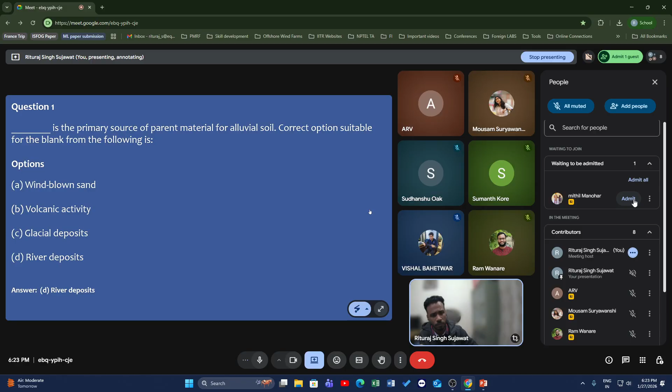So usually the composition of the geological material, which is the alluvial soil, is made up of various sediments which have flowed through, let's say, a particular span of time, and get deposited at a certain section of your river path, and that leads to the formation of your alluvial soil. So for this particular question, the correct answer is river deposit. So it's a straightforward question.

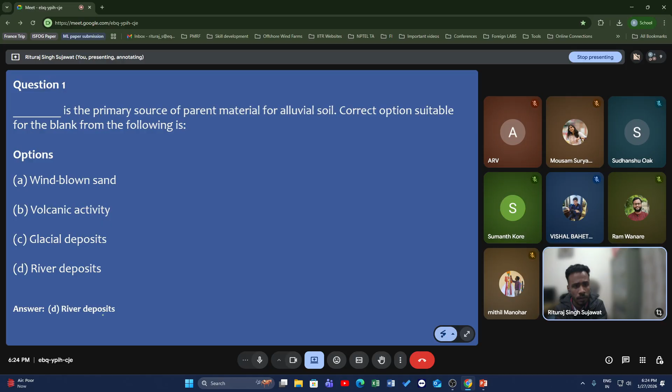If you guys have any query, please raise your concern. Then we can move to the next question.

Yeah. So which is the correct option from the following for the degree of saturation in soil mechanics? So how do you represent the degree of saturation?

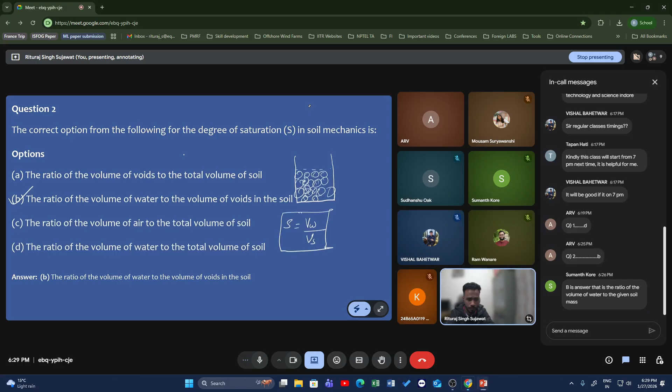Sir, it is VW by VV. Oh, sorry, my bad. Yeah, it's the volume of voids. Yes, so your volume of voids is represented by VV. So S is equal to VW by VV. Yes, guys, any doubt in this?

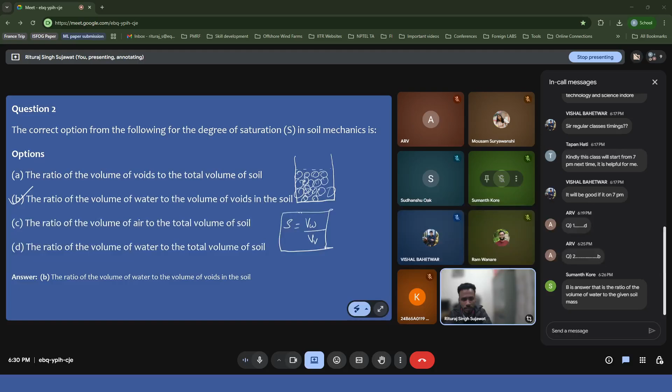So just to brush up again, your volume of water is represented by VW, then you have volume of voids by VV, and then volume of solids, which is your soil particles, is represented by VS. Similarly, your weight of water will be WW. You won't have any weight of the air voids, and then you have weight of solids.

Yeah. So let's move to the third question, guys. Any discussion on this, if you want to have? Okay. Moving to the third question. So you need to show how we represent the coefficient of uniformity. What is the particular relation which we use?

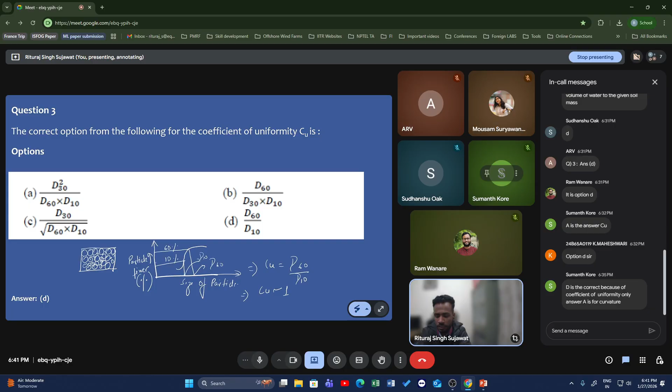Okay, if not, then we can move to our next question, which is question number 4. How do you define effective stress in the soil?

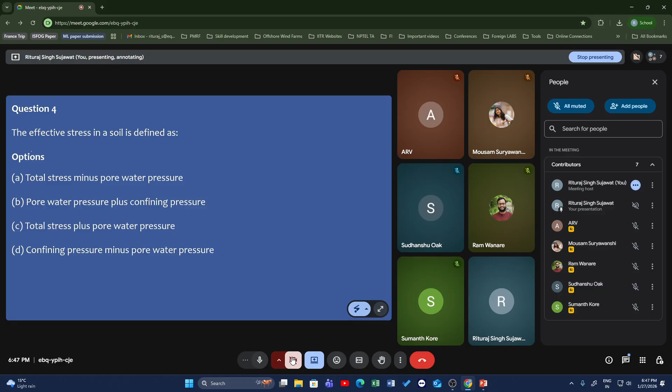Just want to have an answer from you guys. Okay, whatever I am writing, it's not showing you. Wait a second.

Yes guys, so the correct answer is option A, which is total stress minus pore water pressure. So usually stresses in the soils are represented by the effective stresses, and it is a very famous relation in geotechnical engineering, which is total stress minus the pore water pressure.

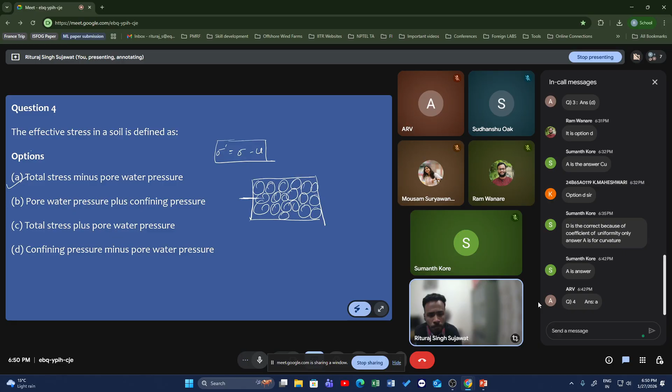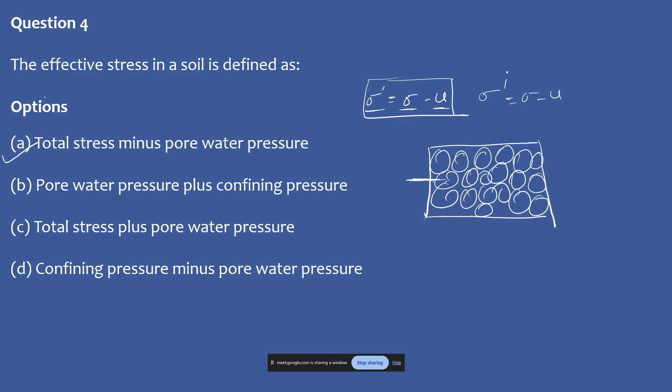Okay, I'll answer this. So usually at any point of our interest, you'll be having the pressure from the soil mass, or from any load coming from the superstructure above the soil. That will impart load at this particular point, leading to a normal stress, represented by total stress. This stress is counteracted by hydrostatic stress offered by water particles between the soil particles, imparting pore water pressure. To account for both stresses, we represent this parameter with effective stress, known as sigma dash. Thus sigma dash equals sigma minus u, total stress minus pore water pressure, giving effective stress. So the correct answer is that option.

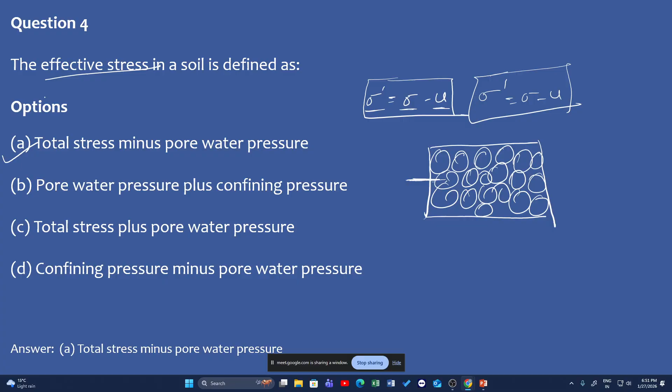So moving to our next question, question number 5. In the Mohr-Coulomb failure line, what does the intercept on the shear stress axis represent? So we are having a Mohr-Coulomb failure line available with you, and what is the intercept on the shear stress axis represents?

If you guys can recall, we usually perform a certain type of test to account for the C and phi parameters of our soil, a very famous test known as the direct shear test. To obtain those parameters, we plot a certain result, and with the help of that plot we obtain the C and phi parameters. So coming back to our question, what does the intercept on the shear stress axis represent?

Hello, you guys can hear me, right? Yeah, okay, okay.

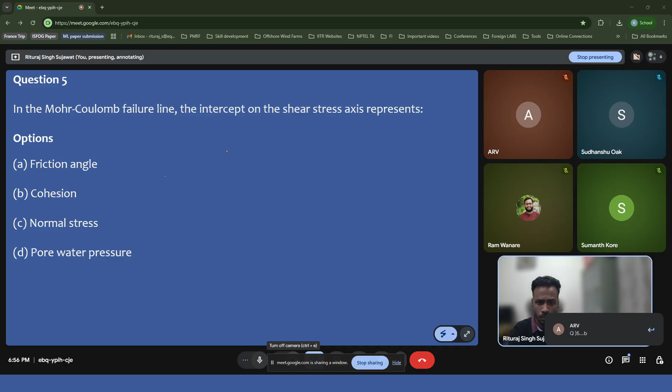So let's look at this. We are having answers from our people. So for those who are new to this concept, let me tell you in simpler terms.

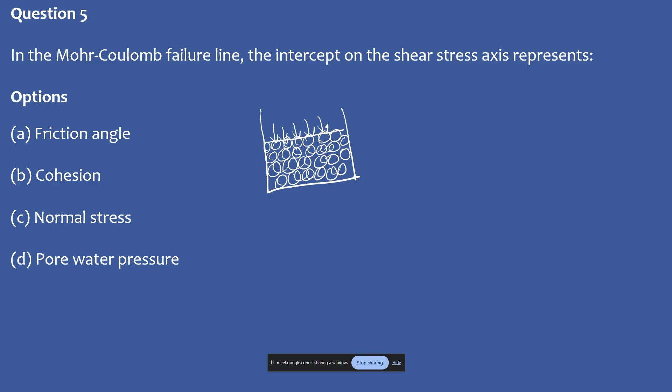Let's say if you are having a certain soil matrix available with you, and it's subjected to a certain amount of normal load. If I take out two particles, these particles will be having a certain amount of normal load acting on them, and also within the particles you will be having a shear force acting along the surface of the soil particle. This is represented by tau, and the normal stress is represented by sigma n.

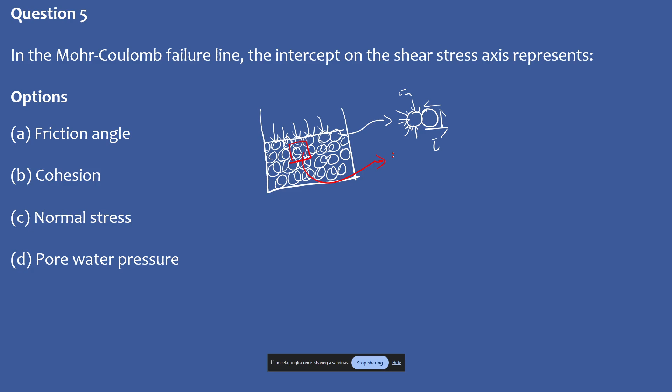So to account for the failure of this soil mass, let's say if I take a certain element out of this soil matrix, a small matrix taken from the bigger one. How big this element size is depends on our engineering judgment, on what we want to account for. So in this soil mass, if I want to define the failure, whether this element containing soil particles, when subjected to some external load, has reached its failure point or not.

We basically perform a direct shear test, which gives us a certain type of plot. On the y-axis you have shear stress, and on the x-axis you have normal stress. This is the Mohr plot, where you have a set of normal stress and shear stress values, and there will be a certain failure line which accounts for the failure of the soil mass.

So the motivation of drawing this part is because you guys might be aware that we perform the direct shear test and obtain this C-phi plot, but at the physical level, what is basically happening? I plotted this to highlight how this element is subjected to normal stress and shear stress, and how you can identify the various parameters in this relation, tau equals c plus sigma tan phi.

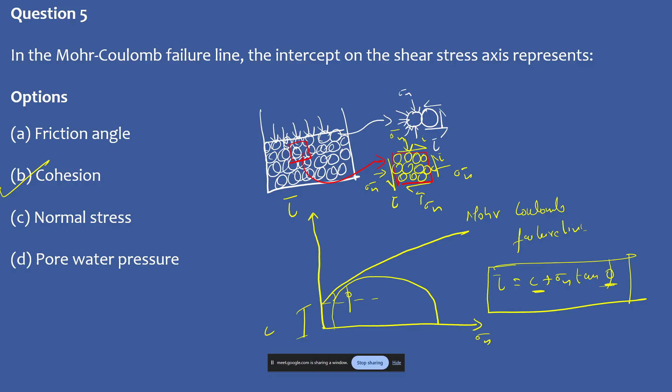So it was having various complexities, but to define in simpler terms, you can understand this y-intercept basically represents the cohesion, and the slope of this line is your friction angle. Any doubt in this, guys?

So the correct answer is your cohesion. If you are having a doubt in this, please discuss, else we can move to the next question. Okay, so let's move to our next question.

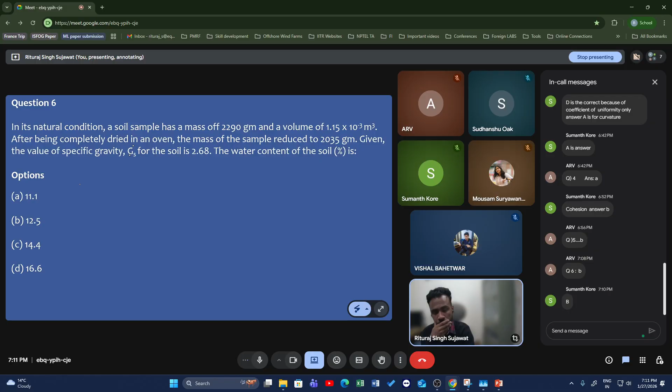Yeah, I think Sumanth has given the explanation itself in the chat box. So let's look at the answer. The correct answer is 12.5. So usually your water content is represented by your weight of water to your weight of the solid particle.

To obtain the weight of water, we usually perform the oven test, where we dry our soil sample and take the mass of the soil sample before oven drying and the mass of the soil sample after oven drying, right?

And so we usually take the difference, which will give you the weight of the water. So in our case, to obtain this, you'll be having 2290, which is your initial bulk mass. Then after the oven drying, it will give you the dry mass, which is 2035. And since your water has evaporated from the soil, the only mass in your bulk soil matrix is your solid mass, which is 2035, and that will give you something, let's say 0.125.

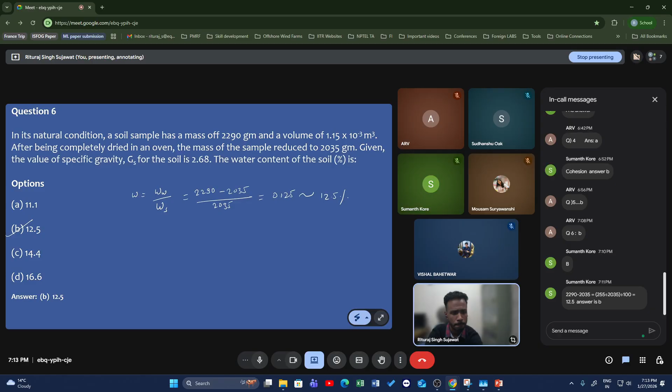And in percentage, it will be 12.5%. So the correct answer is option B, which is 12.5%. So yeah, it was a straightforward question. You just need to know the definition of water content. Any doubt in this, guys? Okay, if not, then let's move to our next question.

Question number 7. For this particular problem, please determine what is your degree of saturation. What are the options, sir? Okay. So these are the options.

Yeah, so you can refer to the data at the back. So this is your water content. GS is 2.68. And then you need to determine what is the degree of saturation.

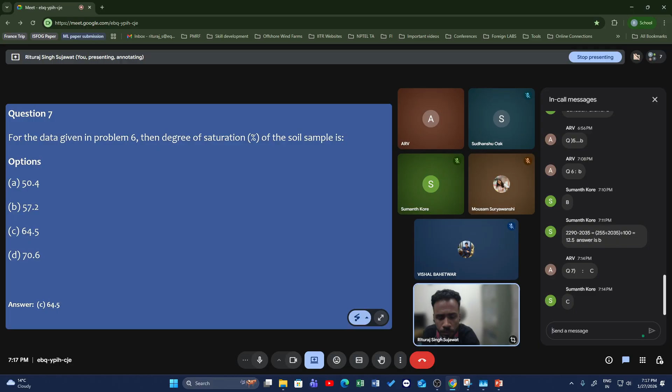So let's check the answer. The answer is option C, 64.5. So how did you guys solve this? So which particular relation we need to go for? GW is equal to SE. I see. So how you will evaluate the void ratio in this case?

So you are having W. Using a gamma dry formula. Yeah. How do you account for that? So it's basically gamma dry. How do you represent that? Mass of the dry soil, 2035 grams divided by volume 1.15 into 10 power minus 3. That gives you gamma dry.

Okay. We equate this to G gamma W by 1 plus e. Yeah. G is known to you, gamma W 1 gram per cc we assume. Then we can get a void ratio of 0.514. Yeah. So first you got the gamma dry, and then with the help of the gamma dry, you got the void ratio, right?

What is the gamma W you have taken? 9.81? It is 2035 grams divided by... gamma W, sorry, 1 gram per cc. Because I converted everything in gram per cc, therefore 1 gram per cc I have taken. Any other way, guys, you have taken?

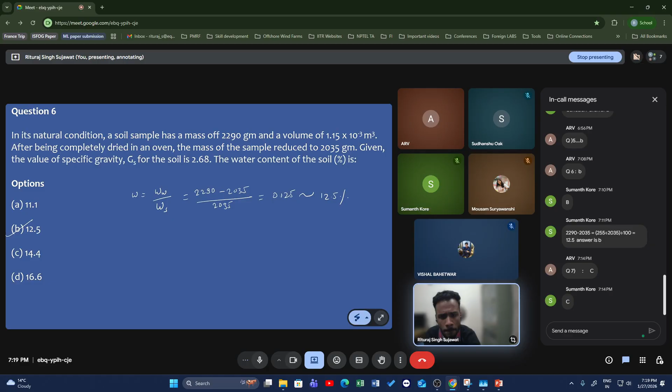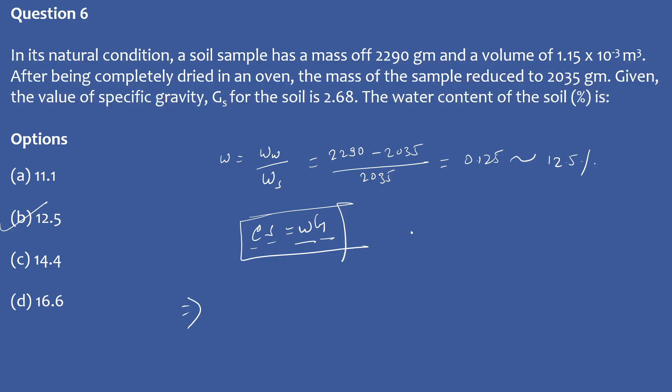Okay. Yeah. So let's solve this. There's a very famous relation which is your eS is equal to wG, where e is your void ratio, S your degree of saturation, w water content, G is your specific gravity. Now how you will account for the e? So there's another relation, gamma dry, which is G gamma W upon 1 plus e, right?

And now here comes how do you calculate the gamma dry. So gamma dry is none other than the weight of the dry soil to the initial volume, right? So it's basically 2035 and your initial volume is 1.15 into 10 to the power minus 3 meter cube. We can calculate it in terms of rho dry, so we don't need to take the weight of the soil, we can just deal with the mass.

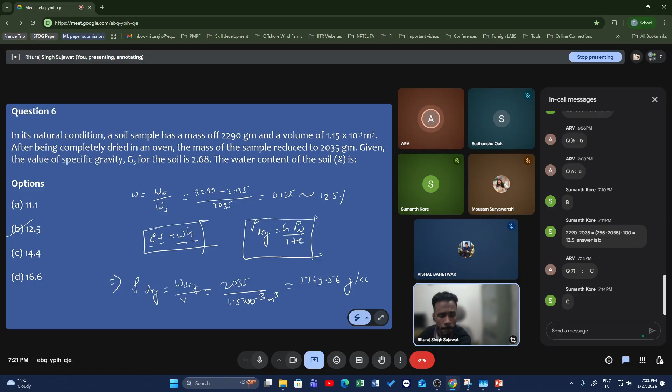Okay, so this is how your dry density will be taken into account. And how much is this value? Is it 1769? It is 1.76, sir. Yeah. So again, 1.15 meter cube. Numerator is given in gram, denominator in meter cube. You will need to convert to centimeter cube. No worries.

So 2035 gram, if I take it into centimeter cube, you just need to multiply by 10 raised to the power 6, and how much you will get? So 2035 by 1.15 into 1000, 1.765, sir. 1.765 gram per cc, right? And with the help of that you can evaluate your void ratio, which is G gamma W upon gamma dry minus 1, right?

So your e, you are getting it as 2.68 by 1.765 minus 1, right? No, sir. So something is wrong. G into 1 by gamma D minus 1. Gamma D should come down. Yeah. So gamma dry is G gamma W upon 1 plus e. This is the relation, right?

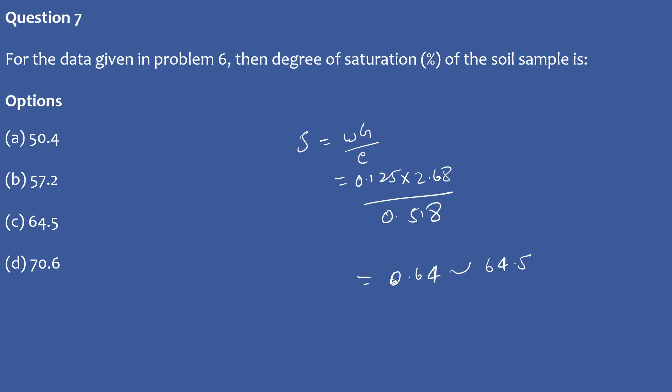Yes, sir. And then you can account for the degree of saturation, which is S equals wG by e. w you have evaluated already, which is 0.125, G is 2.68, and your void ratio is 0.518. So your answer is 0.64, which is 64.5%. So the correct answer is option C.

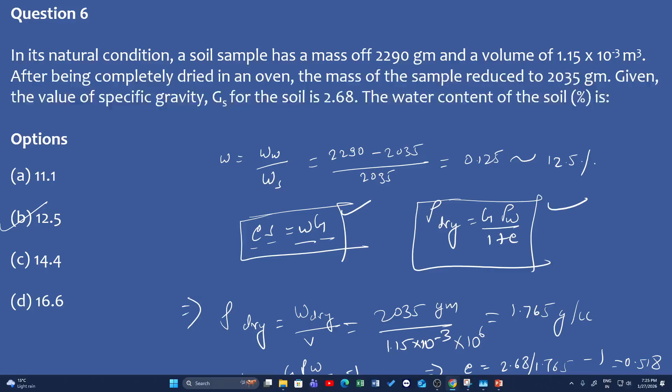Sorry, I made a mistake here in the calculation part. But the two major relations you have to use are eS equals wG and gamma dry equals G gamma W upon 1 plus e. And with the help of that, you can calculate this. Moving to the next question.

So a sand has a maximum dry unit weight of 20.5 kN per meter cube and minimum dry unit weight of 16.2 kN per meter cube. The sand in the field has a moisture of 9% and a relative density of 60%. The moist unit weight of the sand in the field is? So please calculate this.

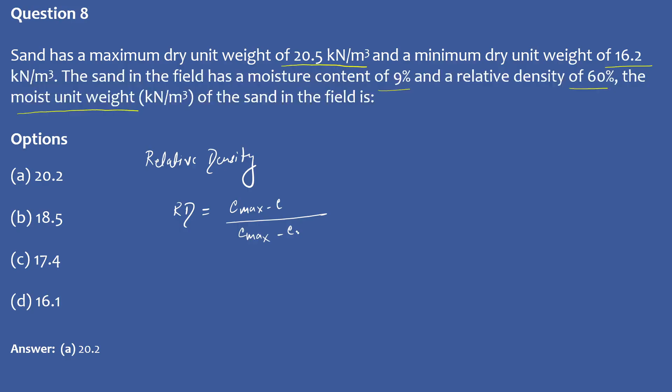And then your relative density is also represented by 1 upon gamma minimum minus 1 upon gamma, by 1 upon gamma minimum minus 1 upon gamma maximum. Is it right? Okay. Gamma maximum by gamma, into gamma minus gamma minimum by gamma maximum minus gamma minimum. It's correct, sir. Correct, right? Yeah. So with the help of this particular relation, we can find it out.

Suppose your relative density has been given in these terms, which is in terms of the unit weight. So your relative density is none other than 1 upon rho minimum minus 1 by rho, by 1 upon rho minimum minus 1 by rho max. So your relative density is given as 0.6, and 1 upon rho minimum is 1 upon 16.2, minus 1 upon rho, which you need to find out, and then 1 upon 16.2 minus 1 upon rho maximum, which is 1 upon 20.5.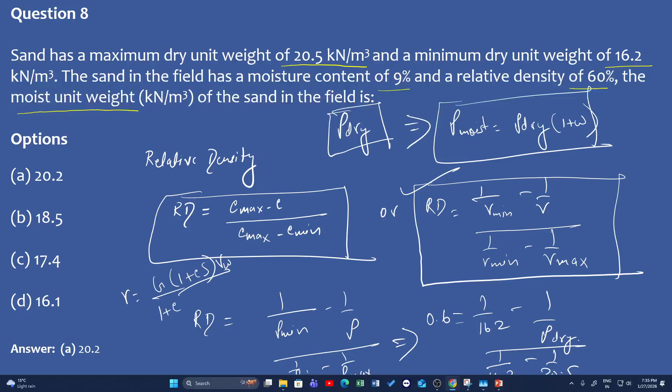Let's move to our next question then. Question number 9. The void ratio of the sample decreased from 0.92 to 0.81 in a laboratory consolidation test when the pressure was raised from 2 to 3.5 kilogram per centimeter square. The coefficient of volume change is? So you need to find out the MV value.

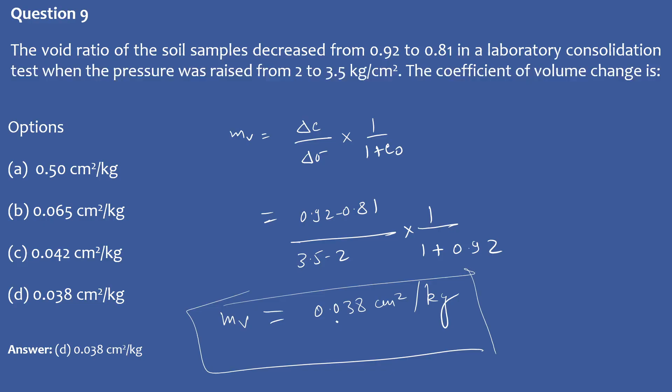So usually, whenever our soil is subjected to some external load, and if you want to account for how much volume change has taken place, we can use this particular parameter, mv, to calculate the volume change. It is the coefficient of volume change, which accounts for your volume change, and it is delta e by delta sigma into 1 by 1 plus e naught.

Moving to question number 10. It concerns the calculation of the effective stress. The groundwater table lies 4 meters below the surface, with a granular soil deposit 6.5 meters deep sitting above an impermeable layer. At 3.5 meters, the effective stress is? So you need to calculate the effective stress at a depth of 3.5 meters.

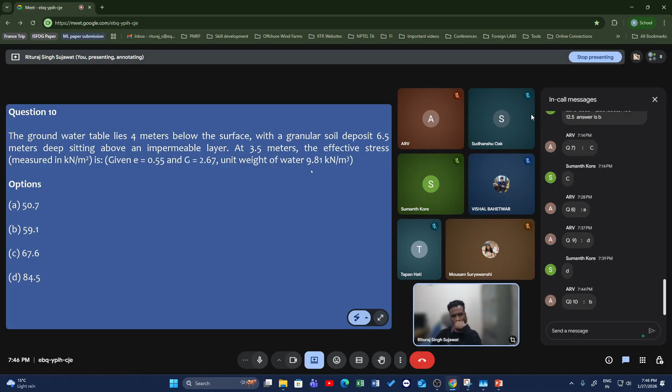So let's check the answer. The correct answer is 59.1. Yeah, it's option B. As mentioned, the groundwater table lies 4 meters below the surface. So let's say this is your initial reference line, this is your 4 meters, with a granular soil sitting above an impermeable layer. Overall your granular soil depth is 6.5 meters.

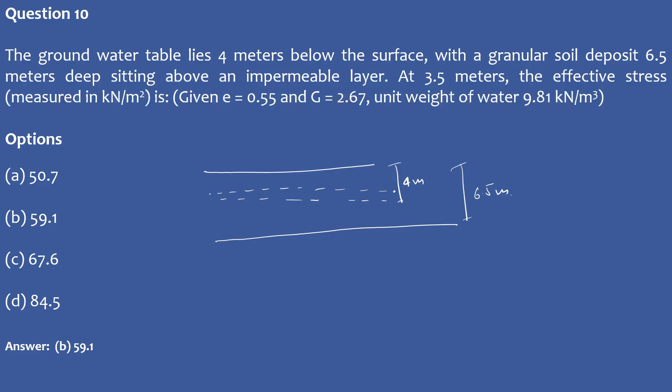So at 3.5 meters, you need to calculate the effective stress. Here is your water table. It's straightforward. You know sigma dash is sigma minus u, right? So at 3.5, you need to calculate the unit weight. The dry unit weight of soil into depth Z, which is 3.5. But you need to find the dry unit weight: specific gravity into unit weight of water, divided by 1 plus e.

So how much is it coming out as? 16.9, sir, approximately. Okay, so 16.9 multiplied by 3.5, right, and then your pore water pressure is 9.81 into 3.5? Sir, the pore water pressure is zero.

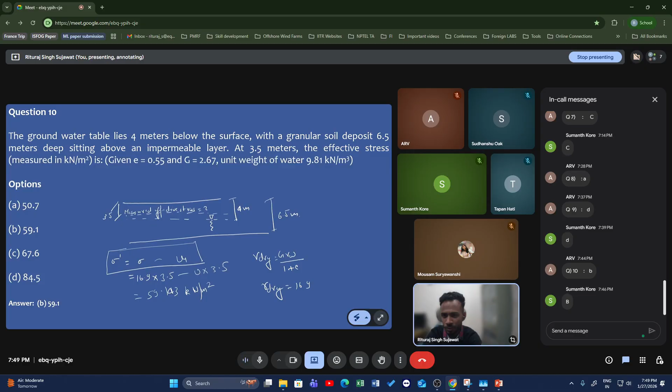Even I am recalling so many relations now. Though we are involved in so much advanced research in our lab, we are not in that touch with our fundamentals. Though we have learned it, and this is the very core of our geotechnical engineering research, it becomes very necessary to recall with time.

So moving to question number 11. Okay, it's again straightforward. You can do this: e S equals w G. Yeah, you can answer question number 12.

Sir, a small query in this question. I recently attempted this question in one of the mock tests. The sand is mentioned to be in its dense state, but they have not mentioned very dense state. Only the very dense state gives the answer as 100%. For the dense state, we cannot define this value. But they are asking the relative density of sand is close to; you can never achieve 100% density, but very close means it should be the very dense state.

Normally we have five states. They are asking the densest state, so will that account for very dense? It's a different nomenclature. Normally in the correlations table they give five correlations, starting from very loose, where RD is 0, then loose, ranging from 0 to 15, something like that, then medium, then dense, and finally very dense, where RD is 100%. It's saying the densest, so I think it's accounting for the very dense state you are mentioning.

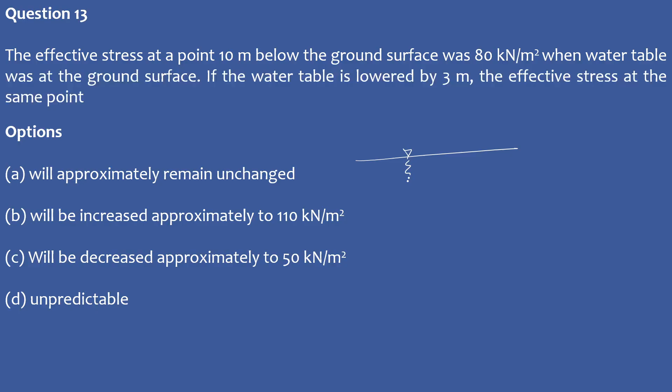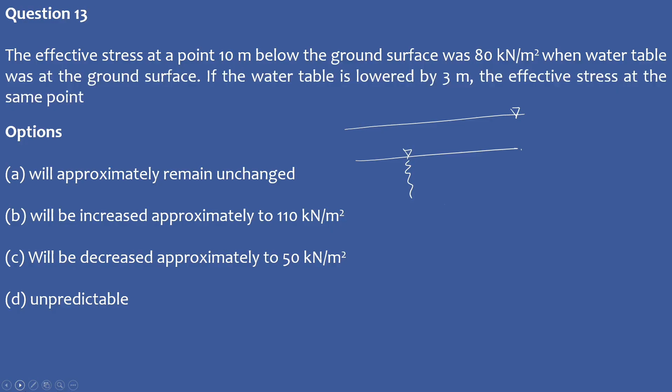So let's say in our case, this is your water table, and this is the point of our interest, and this is your initial reference line, which is your ground level. So let's say this is your soil element, having sigma dash as some effective stress. If I lower this water table by a certain level, what happens to this sigma dash, will it increase or decrease?

It will increase, right? Because since this water table is lowered, whatever pore water pressure was acting on this is also getting lower, and since we know the effective stress is sigma minus u, since this pore water pressure is lowered, your sigma dash will get increased. Now how much will it increase? The decrement in your pore water pressure will represent your increment in sigma dash, right?

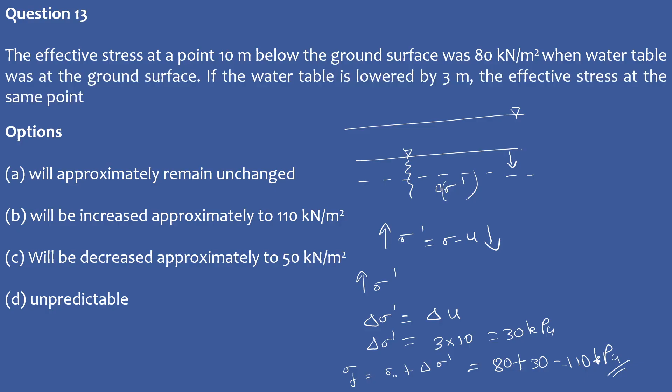So your delta sigma dash will be your delta u in this case, and your delta u is 3 into 10, so delta sigma dash is 30 kPa. So your sigma final will be sigma naught plus delta sigma dash. Sigma naught is 80 kPa plus delta sigma of 30, so this is 110 kPa, right? So the correct answer is option B. It will be increased to 110 kPa. Any doubt in this?